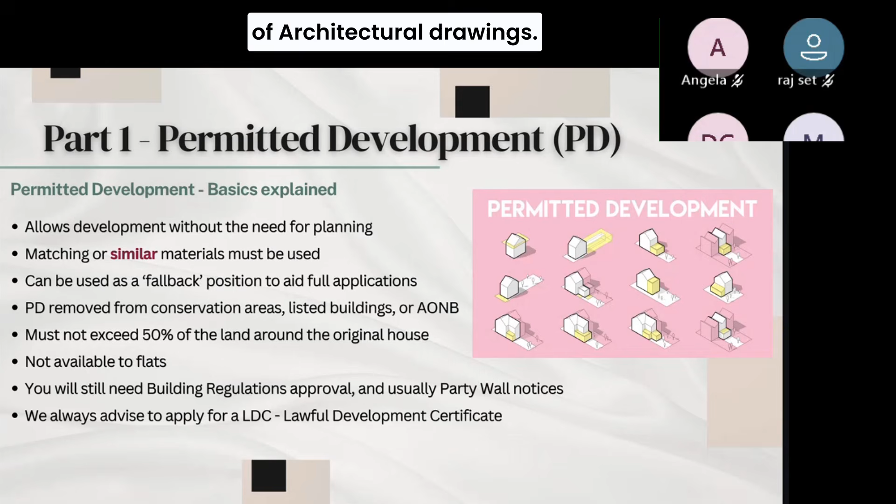Ultimately, with all the work that goes into the drawings, we want to reduce as greatly as possible any risk to our customers, and we do that by making sure everything's super clear. I have assessed thousands of architectural drawings, and I know what works, what the builder sees, and how they interpret them. The clearer you are in the drawings, the sharper the builder's pencil can be, because he sees a good set of drawings and says, I know exactly what's happening here, I've got full faith that this is exactly how to build it. If they take a 5% contingency off their build fee, that covers our fees.

So it's a very easy sell, that one, I would say.

If you ever do come to sell—though most people won't once they've extended or redeveloped their home, because they'll be so in love with it that they'll go to other people's houses and say this is not as good as mine. I have that feeling a lot. I go to a lot of unextended houses and come back to my little extended house and think this is just perfect, I love this. This is better than a house twice the cost.

The houses that I see regularly—it really is a fantastic thing, building an extension or refurbishing a house. A bit of hard work, but many years of great joy coming home to it.

We do always advise, if you come to sell, that we apply for a lawful development certificate from the planners to confirm what we're doing is covered under permitted development. It's just a bit of paper—it doesn't go to a case officer, it just goes to the validation team, who check against some criteria: are the materials matching, does it comply with the next images I'm going to show you? If yes, let's get going—approve it, certificate of lawfulness through. That usually takes around 4 weeks rather than a planning approval, which can take 8.

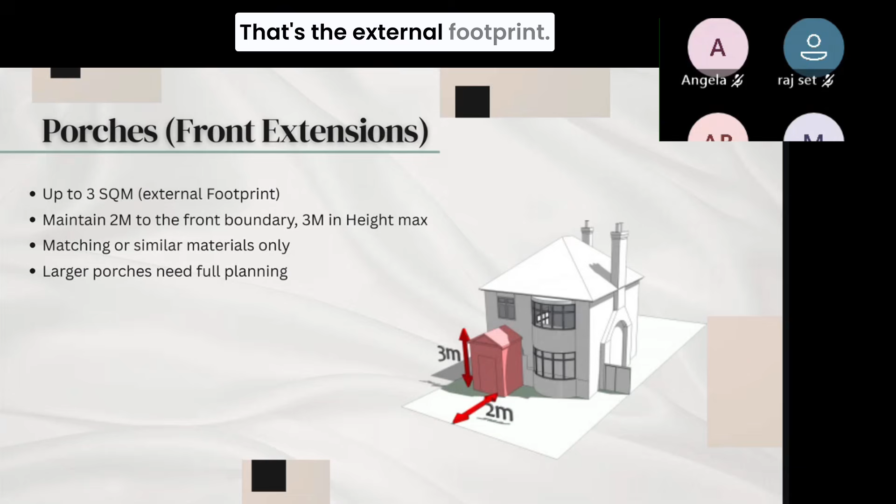Porches: you are allowed to build a footprint of 3 square meters—that's the external footprint. You need to maintain 2 meters to the front boundary, and it's not allowed to be more than 3 meters in height. What that means is any changes to the front of a property are kept relatively minimal, and you can still read the street as it was originally built, albeit with sporadic small porches added—again, matching or similar materials. They like a lot of glass as well, just to see through it to the structure behind. Anything bigger than that needs full planning.

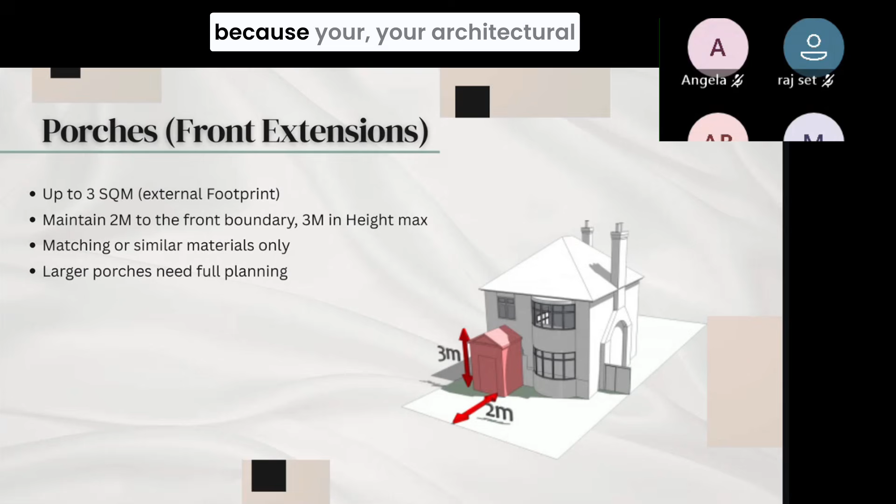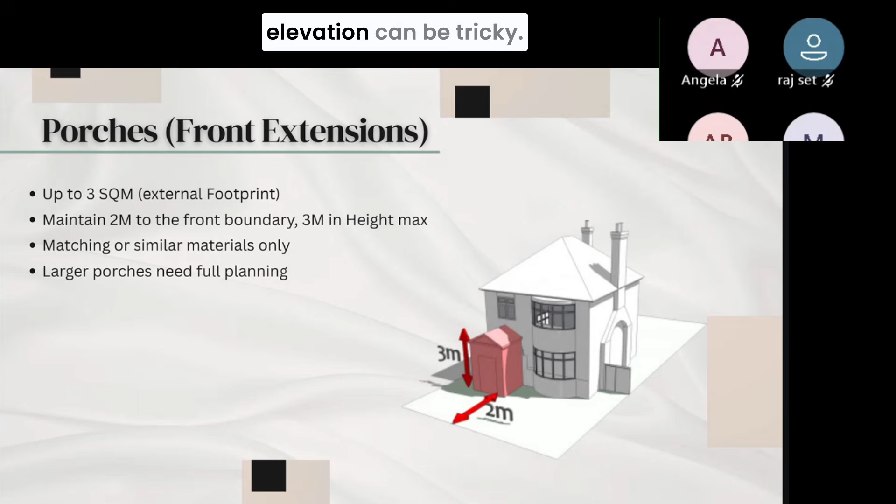I don't want to put people off going for full planning—in fact I want to encourage it, because your architectural team with good experience will be able to offer sound advice. But if you are on a relatively uniform street, coming forward of that principal elevation can be tricky. In fact it's more than tricky, I'll be honest, it's almost a straight no—unless you've got a staggered street or large detached properties of varying styles. Anything uniform, they want to try to keep uniform. Right, so that's porches.

Okay, single-story rear extensions. We do a lot of these. We replace a lot of conservatories with beautiful open plan spaces.

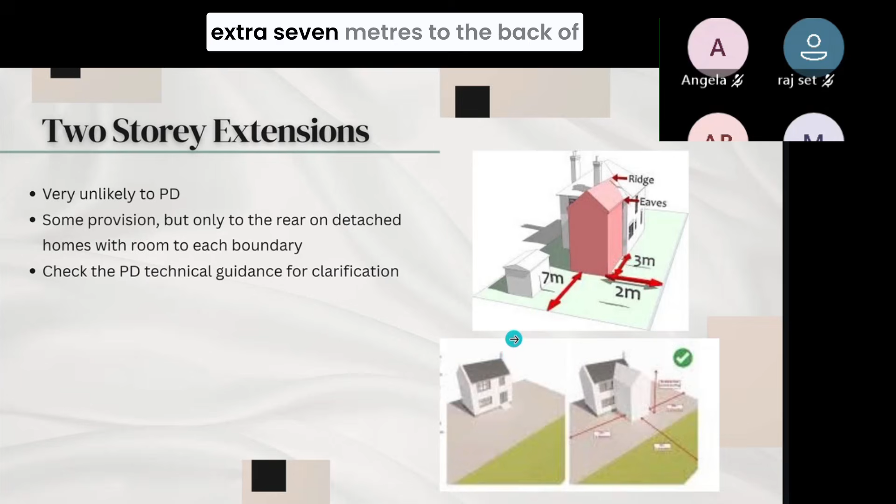Two-story extensions, we haven't done many of them, and I think mostly it's because this 3 and this 7 is usually- you don't usually have an extra 7 meters to the back of the boundary. Detached properties maybe, but if you're in a detached property, this would get planning anyway. Like I say, we don't do a lot of these.

We don't feel the need to go down the permitted development route here. I think it would be closely looked at, but there is some provision for it- only to the rear, detached homes, and again, room to each boundary. But again, depending on your circumstances, we could have a look and see. I would only go for this if we felt that it would not get a full planning application.

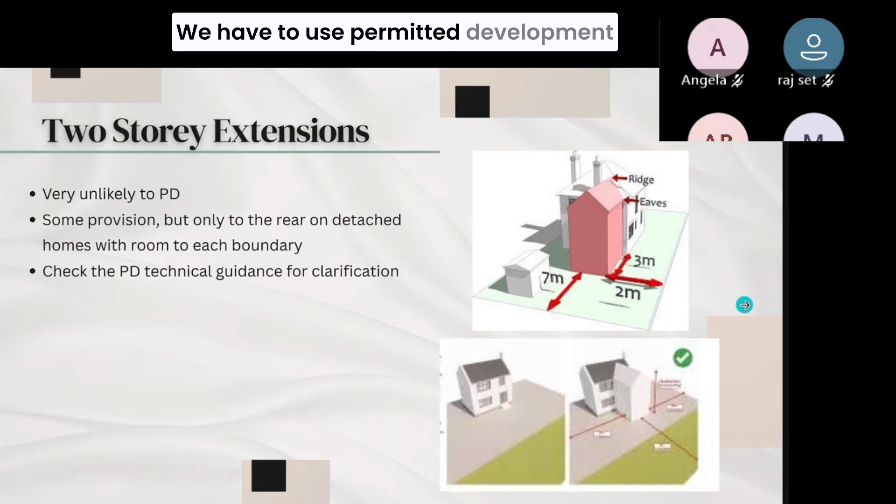And that is an important distinction because it's very valid for loft conversions. We have to use permitted development for certain types of lofts, which we'll come on to. Probably now. Yes, now. Great.

Loft conversions, an incredible use of that space up there. A couple of caveats again: we're not allowed to raise the height of the existing ridge, and any dormer is not allowed to be higher than the original ridge. We're not allowed to put dormers on the front elevation. They have to be Velux or roof lights only.

If there are examples of dormers on the front elevation in your street, you may well get planning approval for it, but we couldn't cover it under permitted development.

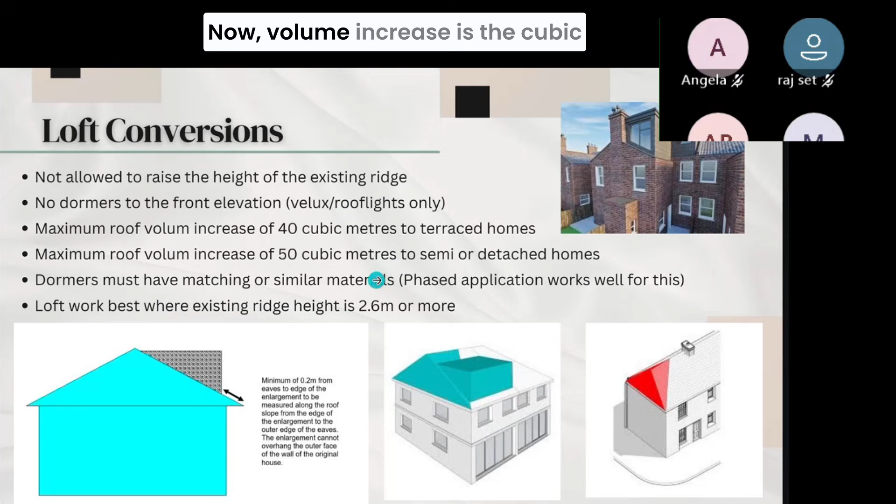The maximum roof volume increase is 40 cubic meters on terraced homes. Now, volume increase is the cubic meters of, say, this dormer. It's not the space within the existing loft that you're converting, it's this red box where you calculate that additional volume. And it's 50 cubic meters for semi or detached homes.

And if your home already has an extension, that eats into that cubic meterage allowance as well. We need to do a calculation when we do these dormers to show that we're within 50, and we're quite clear early on with images like this about how big we think our customers could go. Again, part of that needs an options review.

Again, they must be matching or similar materials. Phased applications work well. We go in for permitted development with a permitted development compliant solution, and then we go in for an additional application just to change the material of the outside. We say, look, we've got a dormer, here it is, now we just want to change it from slate to cladding. But that's the process we have to go through if you're desperate for cladding over slate, for example.

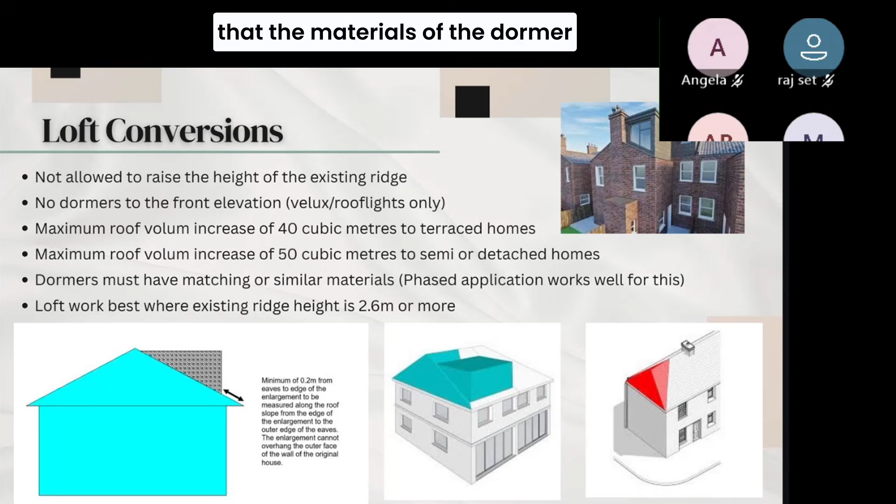We can use cladding. The wording in the permitted development technical guidance is that the materials of the dormer must be matching or similar. If you have a deep red concrete tile, you can't hang those on the dormer, so we would go in with a deep red cladding, and we get that through fairly regularly.

If you're thinking about a loft conversion, do get up into that loft. We're really looking for 2.6 meters from the top of the ceiling joists up to the underside of the rafter, because by the time we've strengthened the floor, insulated, put a likely ridge beam to allow us to take out all of the structure internally, that can drop your head height by around 40 centimeters. So you end up with a 2.2 loft, which is still comfortable, unless you're 6'2" or 3 or above, in which case it can feel a little tight.

Another great alternative, if you bought a wreck and it's a fixer-upper, is to just drop those ceilings on the first floor by just 20 centimeters perhaps, and then you end up with two bedroom accommodation floors with a similar head height, which I think works well, and it's not that disruptive. A couple of days of dust, but there we are. That's another idea, an option.

Oh goodness, we're past already.

I like prior approval applications. We don't use them enough, but you can do some cool stuff. You can build, so long as your neighbors don't object. So you need to have a quiet word with a bottle of wine in hand, I think. You can go, it's crazy, 8-meter rear extensions for detached homes, 6-meter rear extensions for terraced or semi-detached. Same height restrictions as permitted development. And if there are no objections from your neighbor, plus a couple of other checks, it will be automatically approved. So prior approval is the line between full planning and permitted development, where they do a couple of extra checks but aren't looking as closely as they would a full planning application, which we'll come on to next. If there are objections, the council will assess and most likely reject.

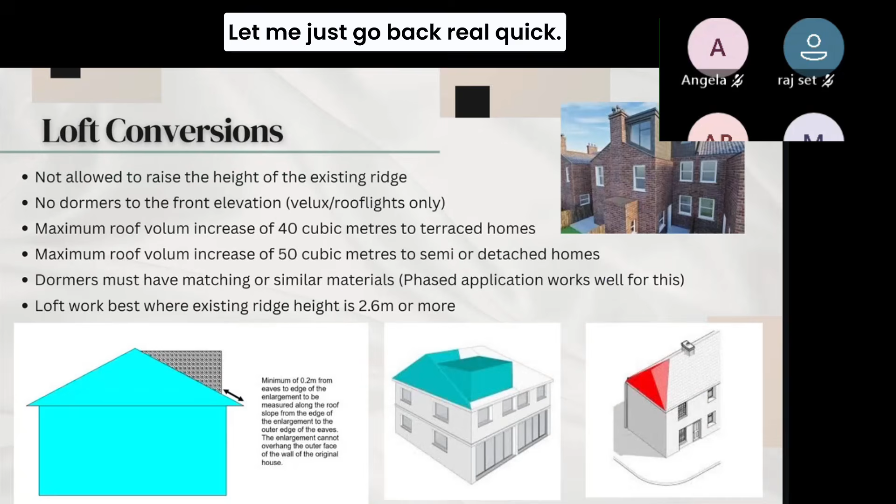Oh, this is the one thing I didn't tell you about lofts. Let me just go back real quick. Loft conversions - a flat roof dormer has to be done under permitted development because it will not be approved under full plans. So you have to comply with the 50 cubic meters. You have to go in for a certificate of lawfulness. You can do this hip where your roof comes down to gable and then build a dormer, and we can often get those through within 50 cubic meters still, but we cannot affix this kind of work with something on the ground that needs a planning application. We need to submit 2 separate applications.

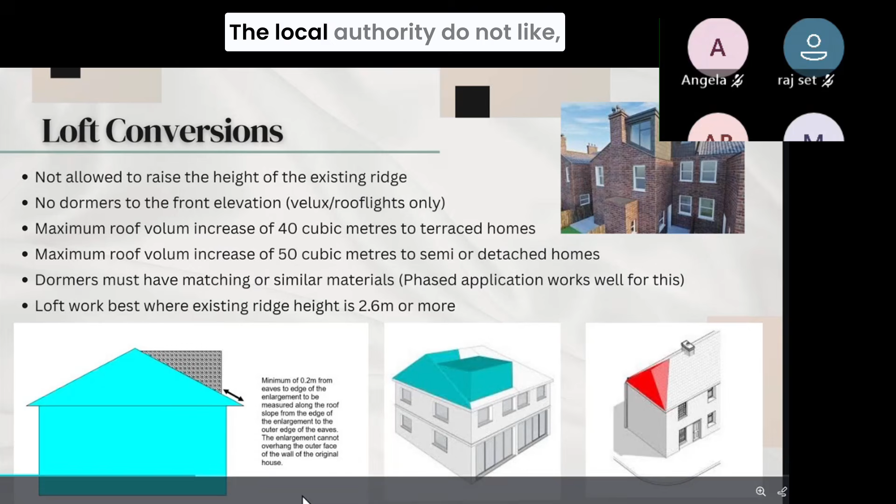The local authority do not like flat roof dormers, but because central government has allowed it under permitted development, that's why you see so many of them. But we must comply with permitted development rules for lofts if you wanted a dormer window to the back. So yeah, like I say, we can often split between PD for the loft, full planning for anywhere else on the house. A 3 square meter porch is quite small, and loft conversions with those dormers do need to be covered under permitted development. Okay.

Planning, it's not that complicated. It really isn't. But there are some big ticket items that we need to run through. Impact on neighbours, really important to the planning department. The impact on the street scene, which we've kind of covered off already, I think, fairly well. Design quality, scale and massing, and subservience. And then other technical constraints: flood risk, heritage, ecology. Those are the main drivers on the planners when they're looking at these applications. For residential extensions anyway. I mean, they may look at parking and all sorts of other things. They've got a whole list as long as your arm of things that they can ask for, but these are the main things they're considering.

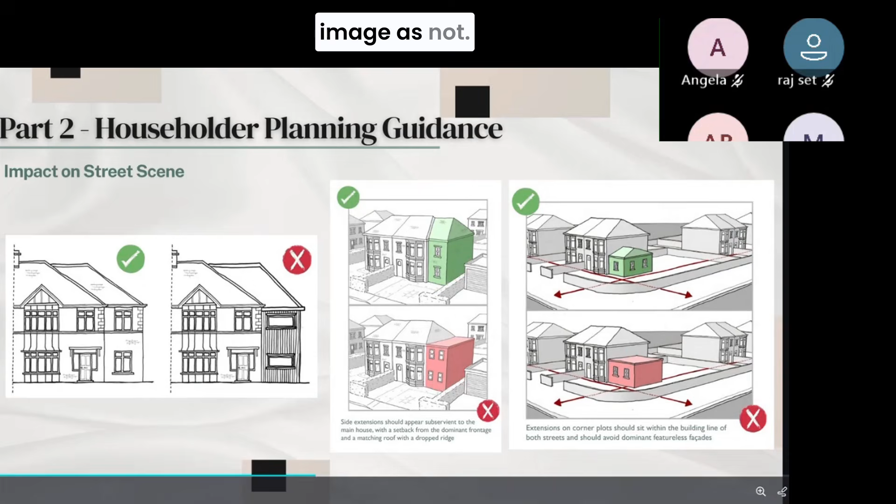I think that's the same image, isn't it? Oh, sorry about that, I must have swapped that out by accident. It wasn't like that in the last presentation.

Porches, again, you're breaking up the street scene here. You can have something nice and small, but this is going to be a no-go. You're moving too far away from the sister property.

When you have a semi-detached property, your sister property does hold quite a lot of sway with the planning department. They don't want these to end up being completely different. You'll see ones where people have painted the whole thing, or they've put in black windows and the other side's got white. They can't control everything, but what they can control, they do control, if that makes sense.

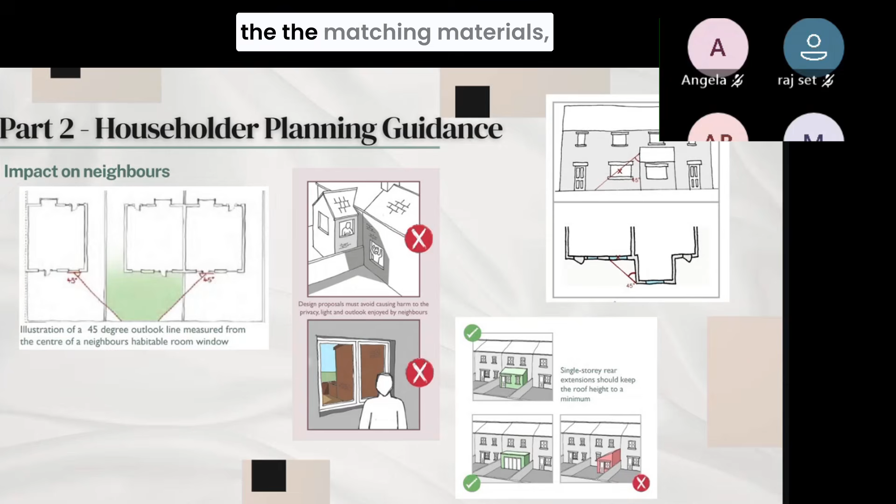Similarly, this kind of roof running across the front of the bay over the door is not usually something they would find acceptable. Okay, so that's the street scene - the need for subservience, the matching materials, the similar form, and then coming forward of the principal elevation.

Another important aspect for the planning department is the householder planning guidance - in particular, the impact on the neighbors. You'd be this person here if your neighbor built this right on the boundary. It's overshadowing, privacy is lost.

You used to have the sun coming onto this part of the garden, and it's just not cool, and the neighbor would object. This is what you would see, and so they say, look, if you're going to build near a boundary, you have to comply with this 45-degree rule. You're not allowed at that angle to cover over more than half of the nearest habitable window, so long as that habitable window is the only source of light.

If you have two windows in the same space, the center line between this edge and this edge is the 45-degree angle. But you can see here again examples - nothing too deep, nothing too tall. They were happy with a flat roof, but anything like this is going to have too big an impact on your neighbor there. And yeah, you can kind of see where that development zone would be.

So two-story extensions to the rear can be tricky unless you build them right in the middle. And then you need to make sure you've got offset distances between the house at the bottom of the garden. If you've got quite close houses and you build windows that become very close to one another, privacy could be lost again. So that's the main impact on the neighbors.

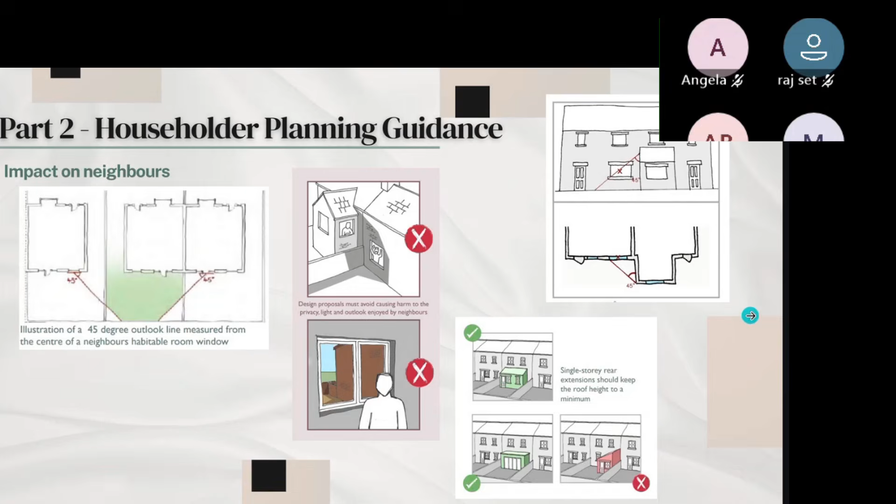Loft conversions can look top heavy from the outside, the few times that you're looking in your garden back at it, but for me, the amount of extra bedroom space, the views from the top, the brand new hotel luxury ensuite walk-in wardrobe space that you can get from a loft conversion, I think it's a price worth paying personally. And there's plenty of things that we can do to make them look fantastic without it looking too cheap and cheerful.

Just by clever use of the soffits or the fascias or the guttering or the cladding or the window types, Juliet balconies, some protective barrier or some interesting glazing options. When we do some mood board work with our clients, we show them some nice little design elements that we could still get through permitted development, but it's going to make your dormers really stand out.

So that's permitted development planning. Let's talk about some costed examples. This is example number 1, and this is in Morpeth.

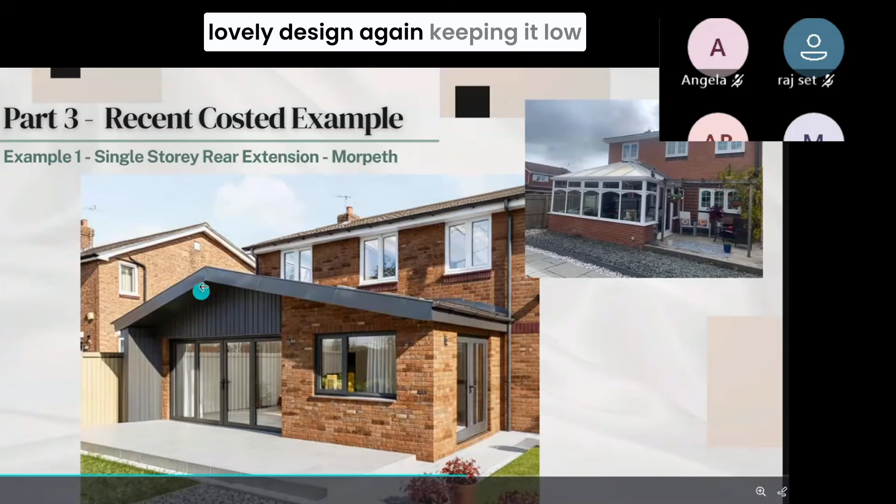The clients came to us and said, I don't know what good it is, I'm not a big fan of conservatories anyway. So we came up with this lovely design, again keeping it low on the boundary, and then this kind of asymmetrical roof. Interesting cladding, it's lovely, I think it's going to be a great addition.

This is what the inside will look like when it's completed later this year. This is what they've gone for - this kind of low-level television, which I think is really cool, and then the workbench behind.

This kitchen is remaining, so these prices don't include the kitchen or flooring or tiling or landscaping. This is the supply of these - the fitting is included, so there's some minor alterations to the kitchen which was detailed and priced for, but the client has to supply the kitchen bits and pieces. Same with the flooring - it's priced in to fit, but the client has to supply. Same with tiling and landscaping again - we showed the area of hard landscaping, contractors priced in to lay it, but the client has to supply the kind of finished materials.

These are the 4 contractors, and as you can see, we do a very thorough tender analysis. This is just the totals. So we were very pleased with this tender return, because the more accurate, the more detailed, the more clear your drawings are, the closer you can get the tenders. This was between 88,000 and 91, so that's probably 5% difference.

We sometimes see a bit bigger - in fact, I probably got bigger to show you today. But around about 105 to 110,000 was that extension finished. We've got some nice vaulted ceilings, some roof lights in there, including the landscaping.

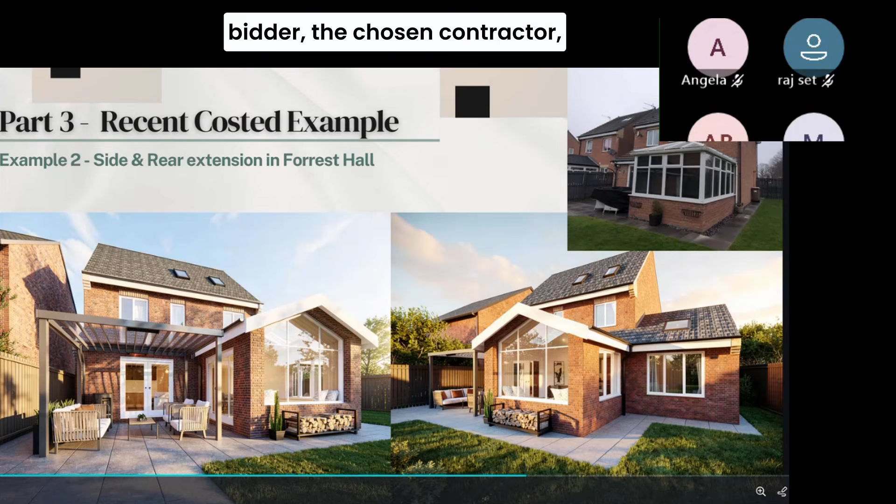This next project, I think, is absolutely beautiful. Again, Forrest Hall - we just got all the tenders back for this one, well not back, but probably a month ago. We've been working with the chosen bidder, the chosen contractor, just to firm up some provisional sums that they put in, mostly for the pergola, the landscaping, and a little bit of flooring. But yeah, no, this is stunning, this one.

So this was a conservatory again. They did use it as the dining room, but it was cramped. They came to us with a pretty healthy budget of around 150,000, and we worked early with them. We came up with some concept designs, we had it priced by our quantity surveyor before we went too far. I'm sorry, I'm getting ahead of myself.

We showed them 3 or 4 different layouts that we thought would work, extending a little bit more here, a bit more there, different ways of achieving the client brief. We had a meeting to discuss that and the planning appraisal. We then subsequently produced some concept designs, which they were floored by, which is always just a lovely thing to happen, and it happens fairly regularly, thank goodness, because of our process.

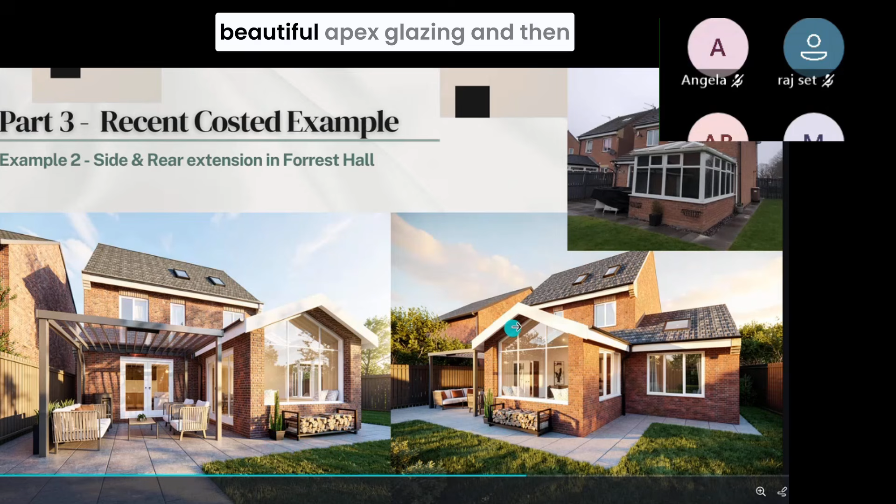But this was a rear extension, replacing the conservatory, beautiful apex glazing, and then a utility living room to the right. I've got the floor plan to show you. So this is the pergola, this is where the sun hits of an evening, so it was important to make sure we got that in.

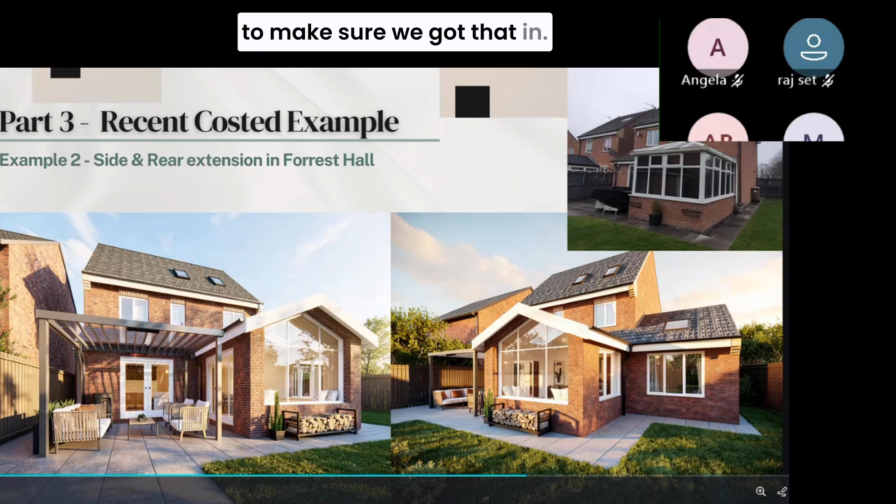And then this is what the inside looks like. So this is their new dining space, feature scissor truss, that apex glazing running around with some nice timber paneling detail running down onto a nice bench seat, and then internally a secret door into the utility, and then this inbuilt media wall here. Now, a lot of firms, from my experience in building control, will just leave you with a finished plastered shell. We do offer this internal fit out detailing, which I just think is so important. You wouldn't get anything like this if it was left to the builder to decide, and it certainly wouldn't be priced in.

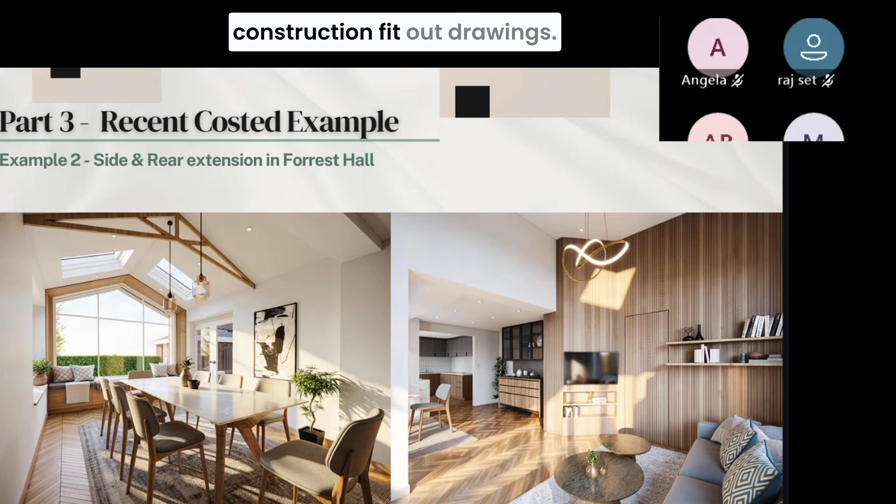So the internal fit out drawings are part of our construction documents, which you're not obliged to purchase from us at all, but we really think it makes the inside look as good as the outside. You'll get these photorealistic renders alongside those construction fit out drawings, and yeah, it's just going to be a great space, completely changed from what they had.

So they spent their life in this tiny little snug, and the sofa was most of this room, and then their kitchen, and then they had the stairs running up, little office, and then this living space.

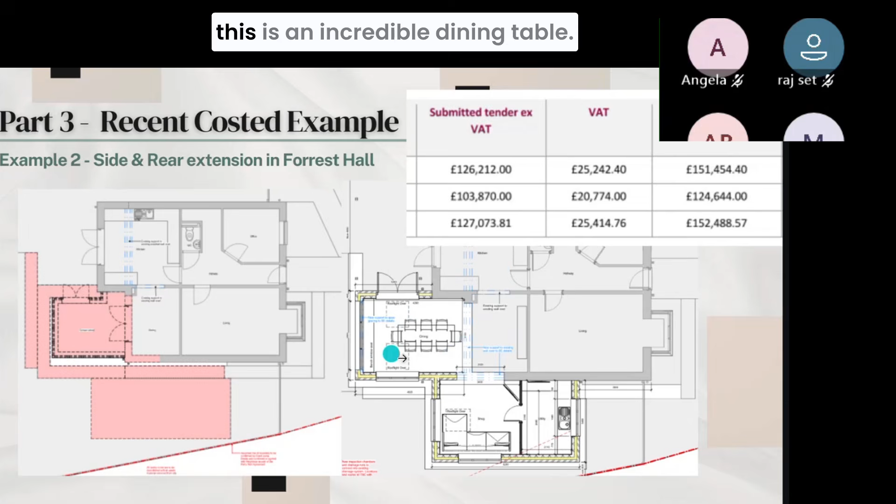And what we're proposing to do is open up. So you come in, this is an incredible dining table, something like 2.6 meters. I mean, it's not going to be an 8-seater, it can easily seat 10 or 12. And then this is all going to be vaulted with the scissor truss and the Velux roof lights.

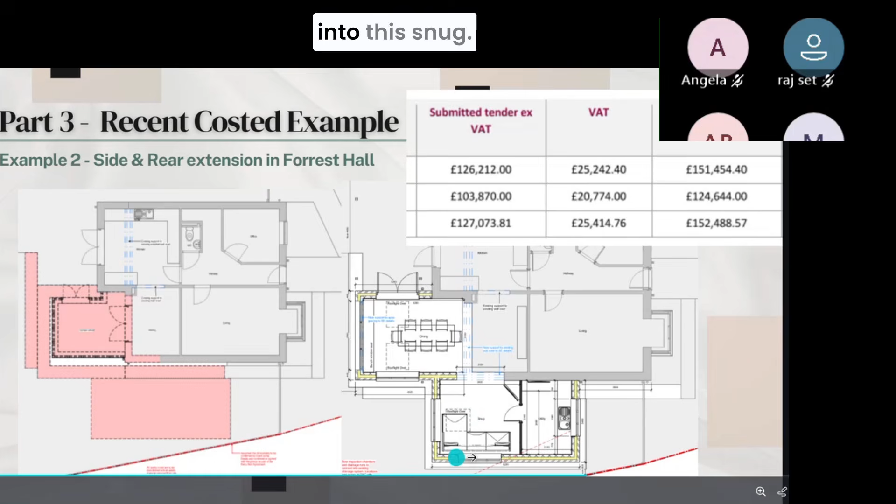And then this will all be open into this snug, and that's that utility wall with that hidden TV unit. And then through here is going to be this utility room slash yoga studio, because there's a television there, and we've made sure that this is wide enough for our client to do their yoga in there as well.

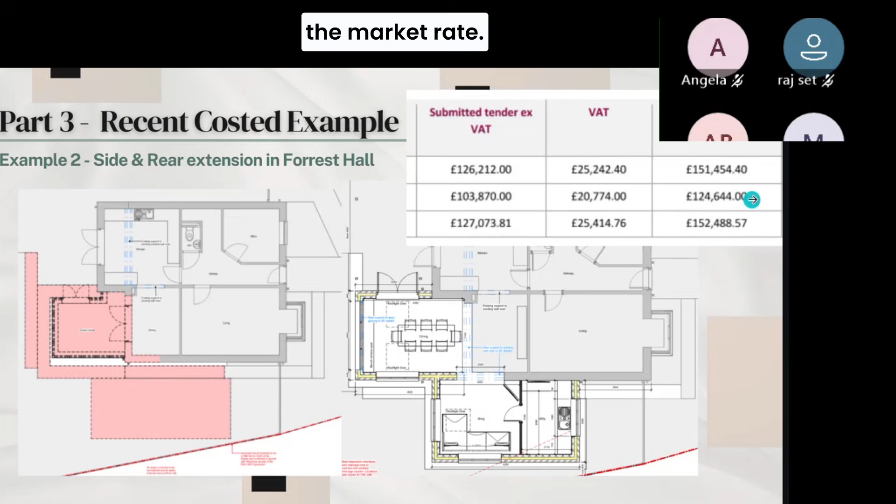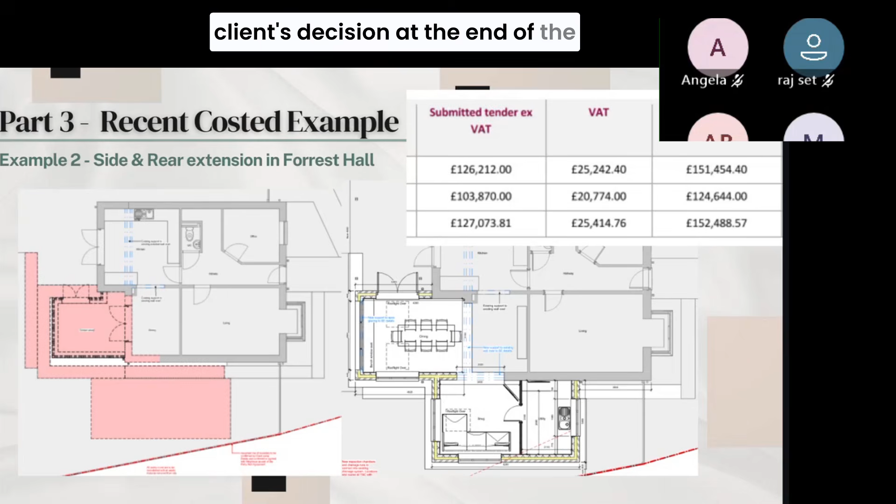So you can see here the totals came back at around 150. This was a lower bid, which we actually discounted because it was quite a lot lower. We felt these two were the market rate. This was a smaller contractor, so we would expect his price to be less, but he was also very busy, and we felt, well, it's the client's decision at the end of the day. These other two were much larger firms, I would say more reliable in that they had the capacity to make sure that the project was pushed through. They weren't reliant on one person.

So let's just say that that's £150,000, and without some of this apex glazing and these Velux windows, perhaps move the extension in without the window seat, or we don't go to town necessarily on the inside, we could easily shave 20 or 30% off that extension.

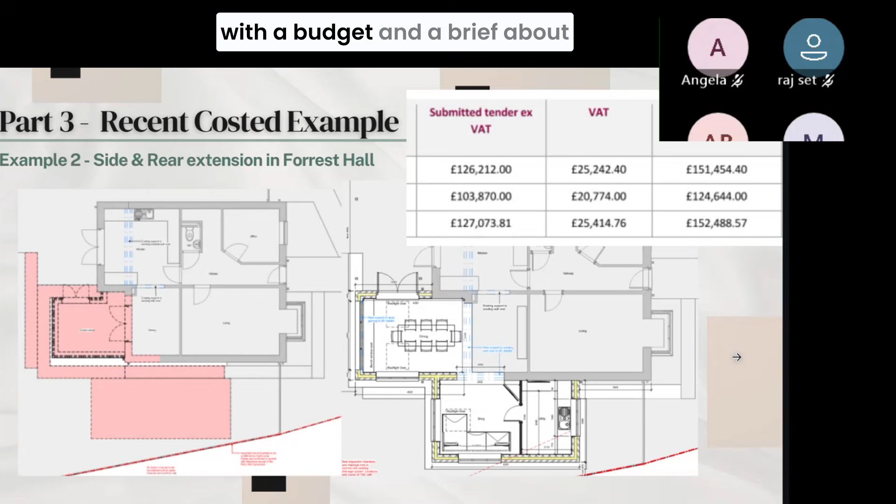And that kind of leads me on to my point that if people come to us with a budget and a brief about how they want to live in their property, it is our job to show them ideas and ways of achieving that. If we don't have a budget, then we'll hit the brief, but no one really knows until too late whether or not it's achievable.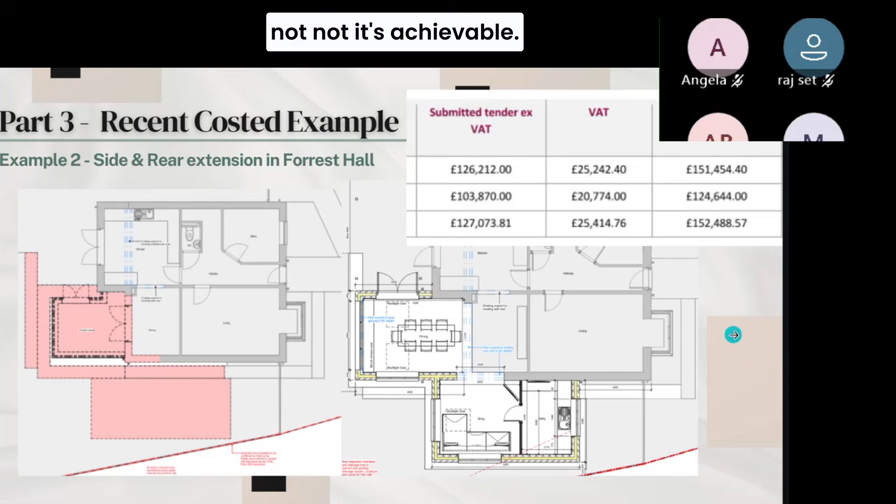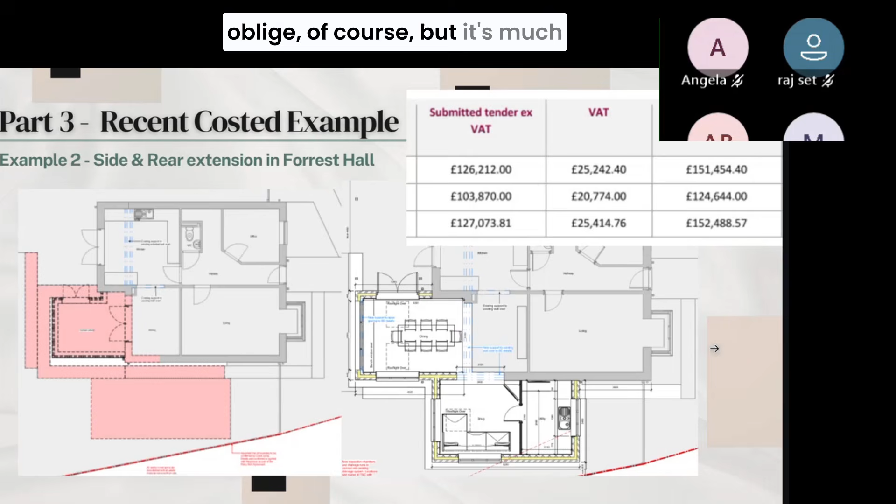And if you come to us with kind of a pragmatic solution, an instilled idea of what you want, again, we're happy to oblige, of course, but it's much better if you say the kitchen's too tight, or the kids are growing up, or we need a space to work from, as well as I'd love to have a utility so that I can bring the dog in from the beach. Those kinds of things are really gold dust for us to understand how we might be able to achieve that, because you've seen planning.

I've not even touched on the building regulations, but there's a lot that goes in, a lot of training in mine and my team's experience that will allow us to come up with solutions that are far better than someone who hasn't done this 1,500 times could come up with. I don't mean to sound derogatory at all.

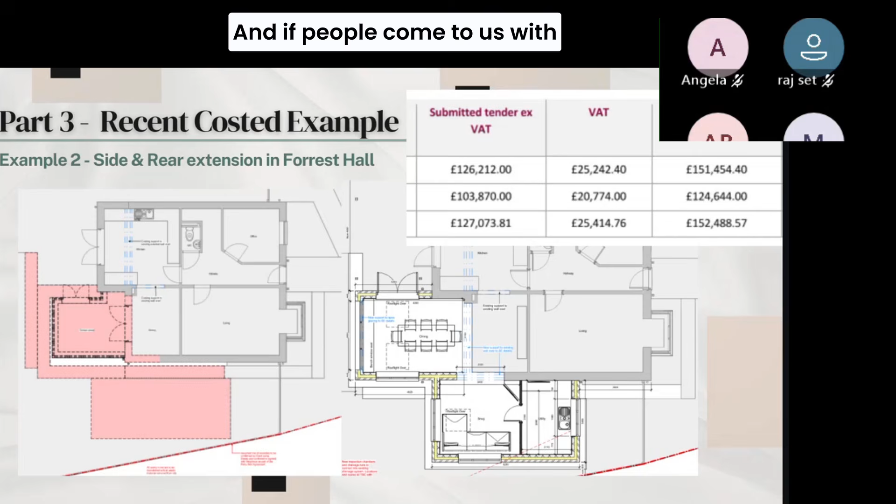We want to understand how you want to live. We want to help, and we want to give as much of our experience to every project as possible. And if people come to us with fixed firm ideas, then it doesn't allow us to do that. Our whole process is built around showing you options anyway, so you might as well use it, right?

Cool. So that's 100, then 150. Here's our 200 one. This is in Woolsington. This is a beautiful big house. The extension is this covered but glazed kind of pergola, outside dining area, the landscaping. This is already an extension, but we're really taking most of it down, replacing this roof, installing a lot more glass. And then this flat roof section over here is going to be their office.

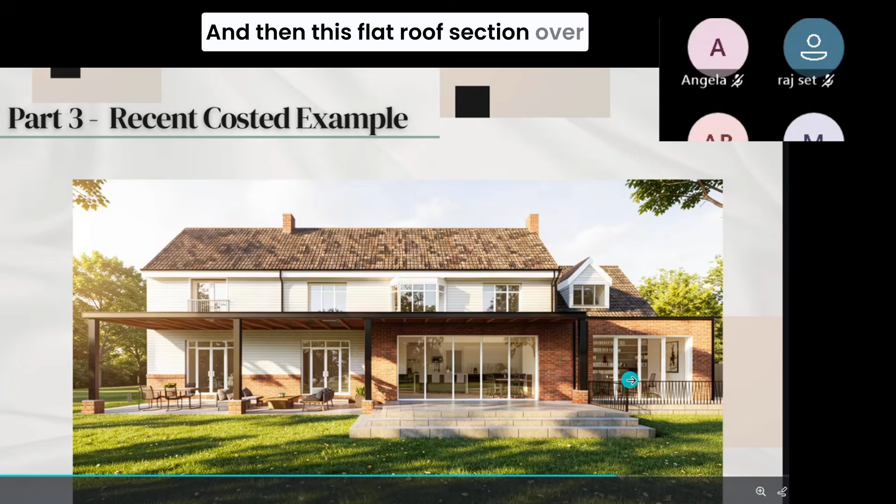We're also doing work to the front. This is an extension, this is a new feature entrance. And again, you can see those glazed sections running across there, which is, I just think, going to be beautiful.

We can refine any design to anyone's budget, of course, within reason. But the clients came to us with a healthy budget, and they came to us with a brief about needing an office space, ideally wanting to be able to stay out of the rain if they're out in the garden, making a bigger feature of the front.

That price does include the replacement of all the windows and quite a lot of internal works upstairs. But again, this is a bigger variance than we would have liked on the prices, but we were somewhere between 190 and let's say 210, and we'll just say that this one was an anomaly. We went back and found out that this contractor had priced in something that they had spoken about on site, which no one else had. So that brought it down about 20,000, but it was still high. But then, including your VAT, we're talking about 200,000 there.

I should say, actually, strangely enough, none of these projects do include an entire new kitchen. Kitchens can be bought from anywhere from 15 up to £100,000. So just bear that in mind if you think that your project might need a new kitchen.

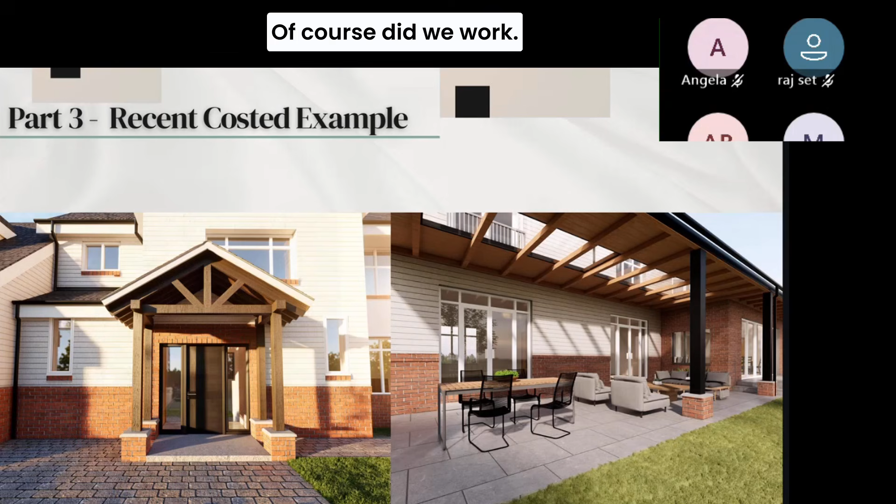But again, like I said, could we have got them the square meterage more cheaply? Of course. Did we? But we worked to the budget at the start and satisfied the brief, and we made sure that there was enough. Or rather, with what was remainder of the budget, we managed to include some nice architectural elements, and those are the things that, beyond the square meterage, you're proud of.

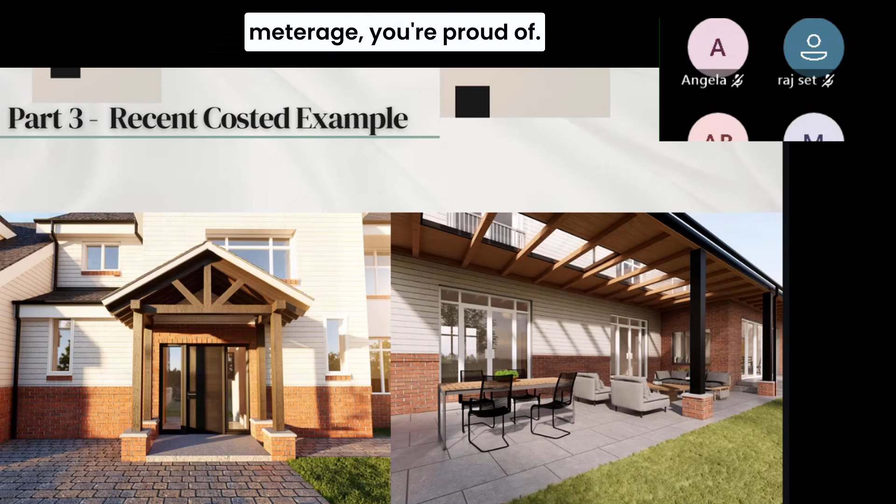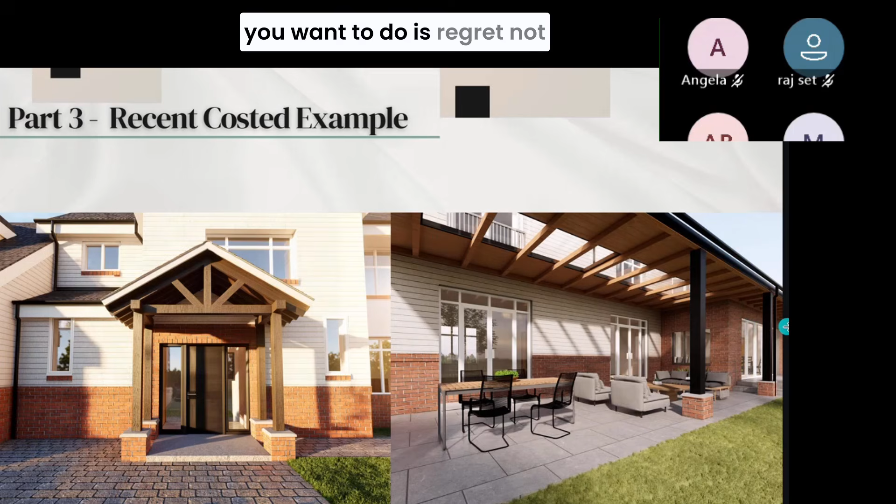But something like this front porch or this covered area, that'll elicit comments from friends and family. And every time you walk under there, you'll think, I'm glad we just spent a little bit more and got something a bit special. Because once you've done this, like I say, you're not going to move. And the last thing you want to do is regret not spending a little bit more on a nice little detail. But again, I've got a dog in this fight, so I'll leave that with you.

Cool, we've done that already. Okay, timeframes is the final thing. We're at about 10 to 8, which is great, so there's going to be plenty of time for questions at the end, I think.

It'll have our kind of main service level 2, which will include 3D visuals. It'll include us going out to tender on your behalf. It'll include enhanced technical drawings, and level 3 includes a whole bunch of extra stuff dependent on some of the choices that you make when we send you our initial questionnaire.